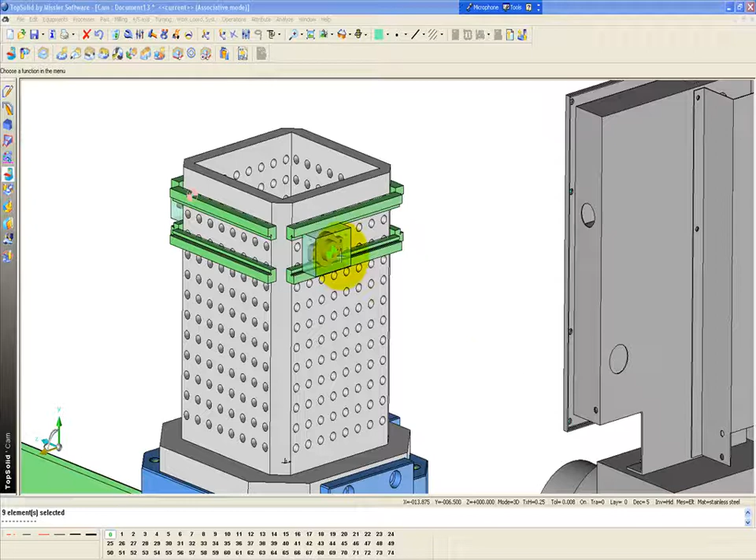Okay, in this next example, I'm just going to add some basic tool path to the part. So here, I'm going to go ahead and zoom up. Maybe I'll switch my color so we can see things a little more easily. And we'll start doing some simple topologic machining.

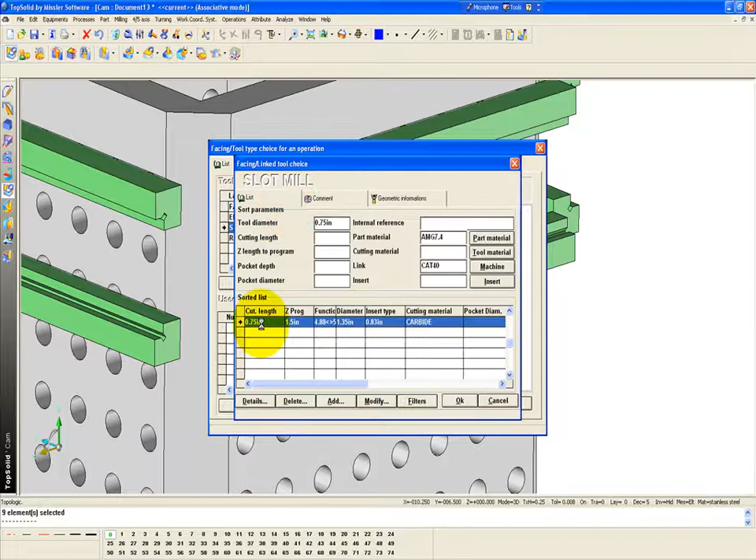So I'm going to select this top face here. I'm going to say facing is okay. I'm just going to grab an end mill for this, and I'll say it's a 3/4 inch end mill. Maybe we want a 3 flute standard length. Now, if you notice in this case, my tool is coming in this orientation.

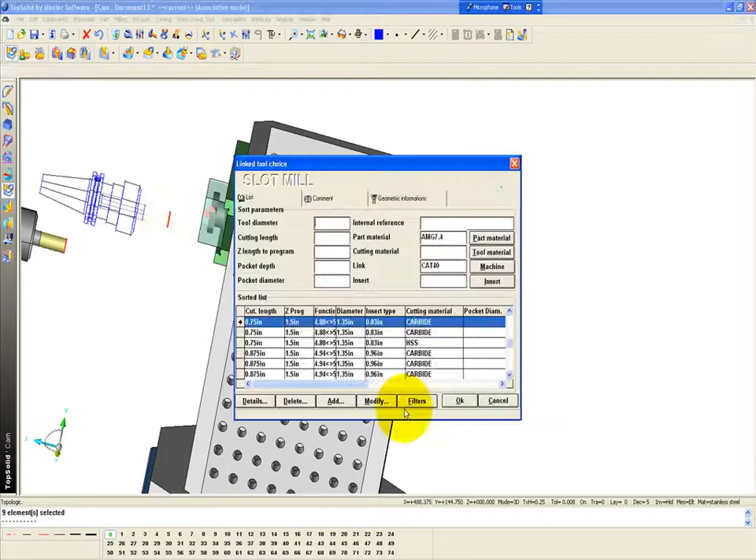When working with multiple parts with multiple zeros inside TopSolid'Cam, you have to pay attention to which part is actually active. So right now, it's thinking I want to machine this part from this orientation. That would not be correct, so I'm going to hit escape, cancel. I'm going to go up here to activate WCS, activate that one, and let's go do this one more time now.

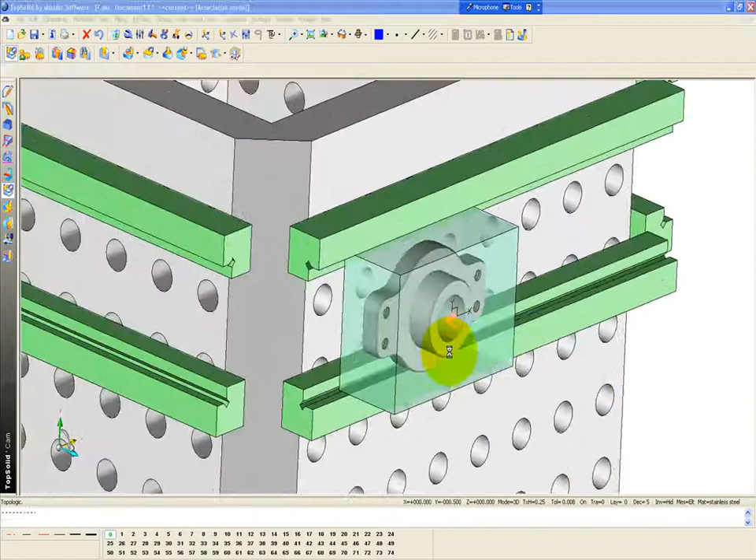So I'm going to select that face, facing, slot mill, set my filter right away to 3 flute standard, and now my filter to 3/4 inch. And now that looks better. That's what we want to actually use to machine with. So we're going to say OK. And in this first one, we just want to face off the part. And here I'm just going to accept my default values for now.

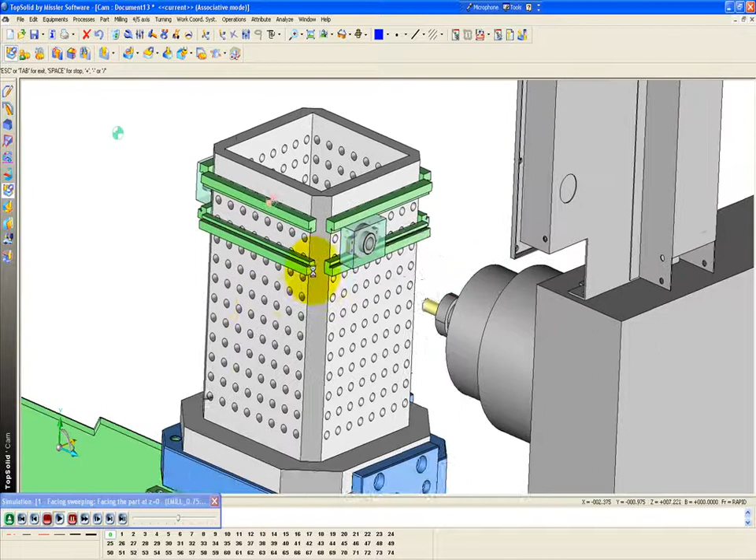Tool's going to come up. You can see the machine moving. And we've faced that all off. And that's the finishing pass right away. Great. Here, I want to go to this level now. This too will be facing.

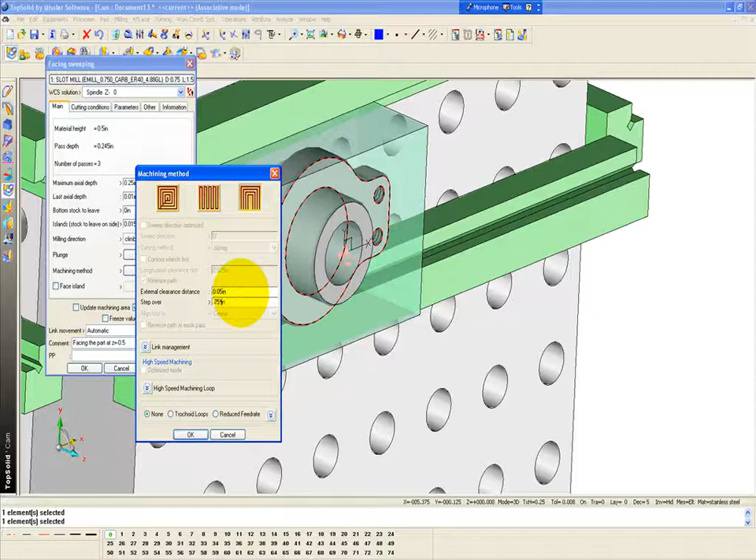Use the same cutter. The thing I'm going to change this time is I'm going to say I want 1/8 inch per pass. Maybe a 1/4 inch, just to speed things along. And bottom stock to leave is 0. Island stock is 15. That's fine. And this time maybe we want successive contouring. I'm going to plunge 50 thousandths off the part and take 40% step over. Say OK and OK. Okay. So now we have that tool path done.

And lastly, I'm going to machine the side of the part as well. So I'm going to select that. This time I'm going to do open pocket milling. Say OK. Again, same tool, why not? However, this time, take it 3/16 per pass at a time, and I'm only going to go minus 50 below the bottom edge. Okay. Stock to leave on the side of 15.

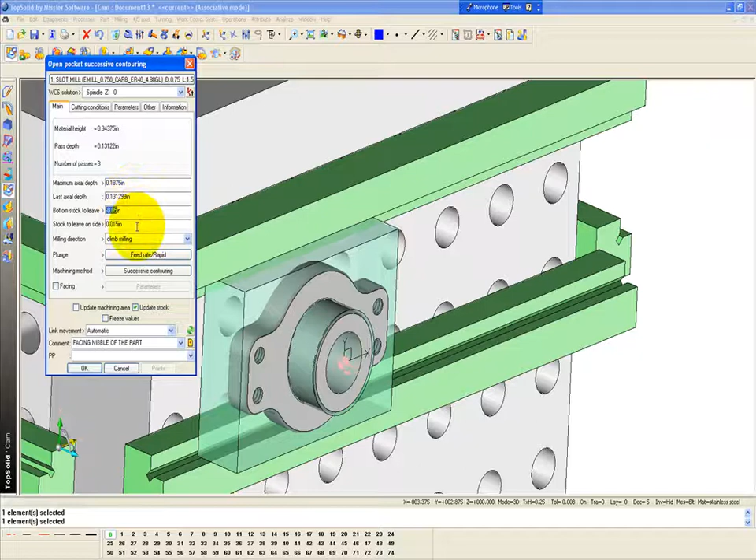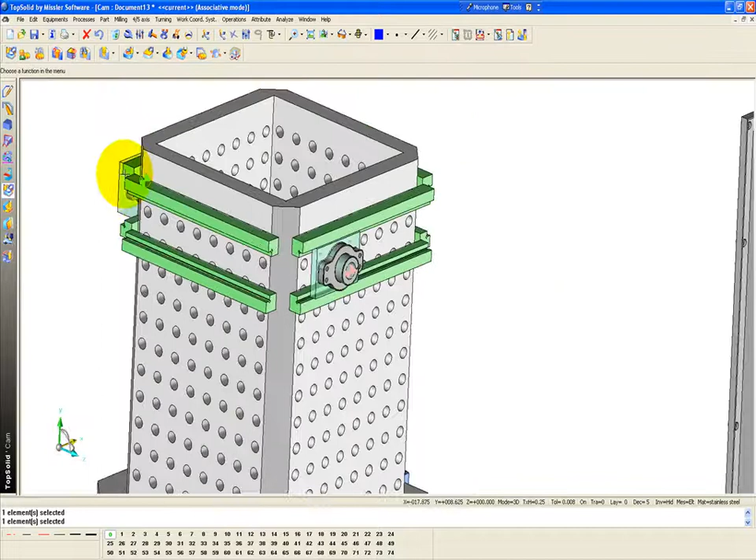And away we go. So now you can see we've roughed everything out. We've finished some of the faces. You can add your drillings, do with this as you like. To make a long story short, I'm going to go ahead and machine the back one over here real quick so then we can start laying out some actual patterns.

So I'm going to go back to here. I'm going to activate that one first. And now what I'm going to do is I'm going to go ahead to topologic. I'm going to select that face. Facing is all we need. And here I'm just going to accept the defaults, keep it simple.

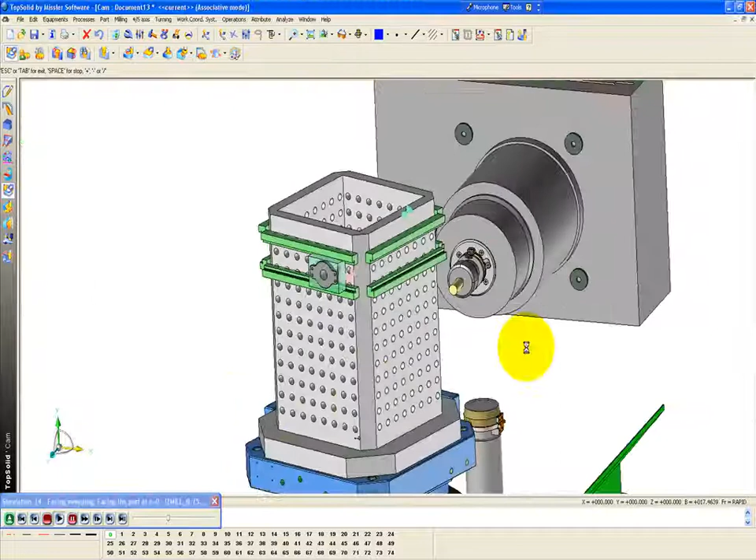We'll see that the whole tombstone is going to rotate to that position. Speed this up a little bit. Tool's going to come up, and away we go. Okay. In the next video, we'll talk about how to lay out a pattern of these parts now. We'll say our machining's done.